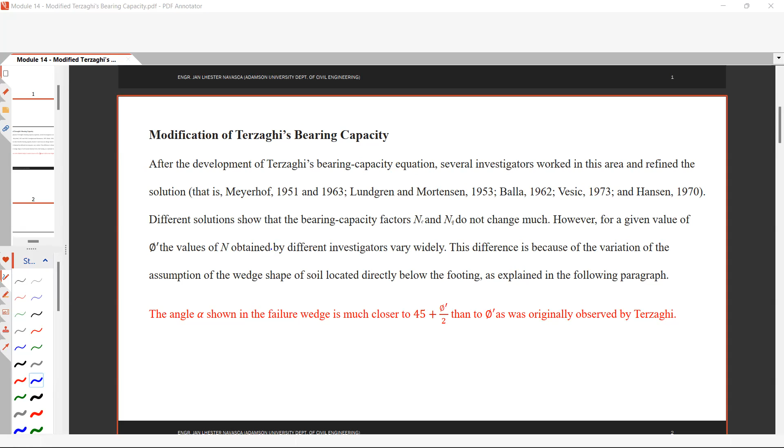It should be N gamma. So for a given value of phi prime, the values of N gamma obtained by different investigators vary widely.

In other words, the NC and NQ are not that far from the bearing factors provided by Terzaghi.

However, for N gamma factors, it shows different values, varying widely. This difference is because of the variation in the assumption of the wedge shape of soil located directly below the footing.

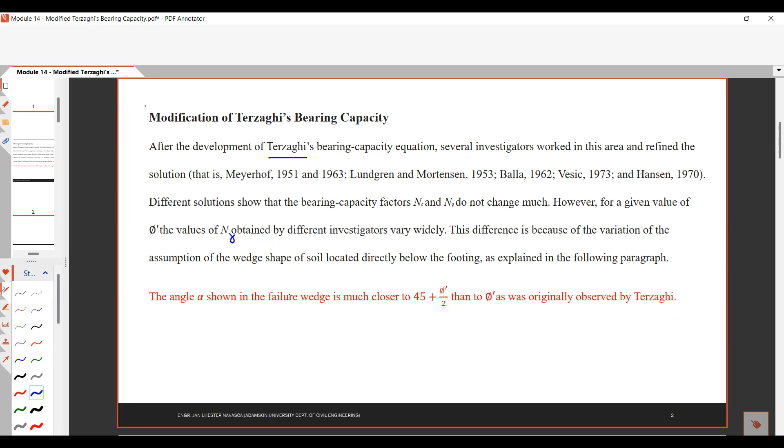As explained in the following graph, the angle alpha shown in the failure wedge is much closer to 45 plus phi prime over 2 than to phi prime, as was originally observed by Terzaghi.

Let's go back to the failure wedge. Let us open the failure wedge shown in Terzaghi's bearing capacity.

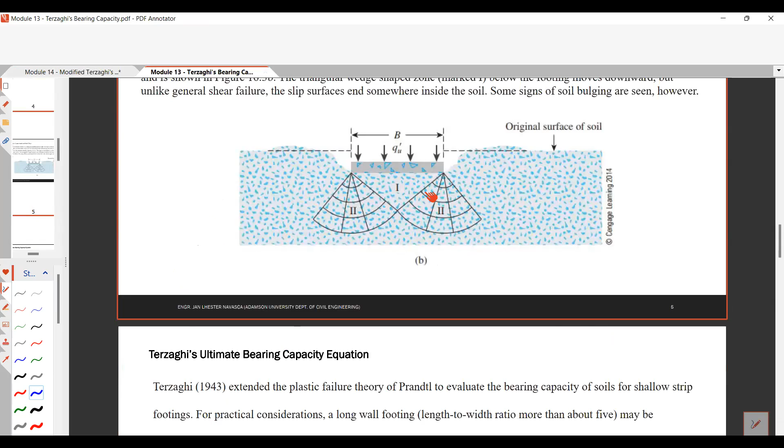Going back to this, the failure wedge they are referring to is this triangular wedge shape zone marked 1. According to them, the angle alpha at this failure wedge 1 is within this range, much closer to 45 plus phi over 2 than to phi prime, as was originally observed by Terzaghi.

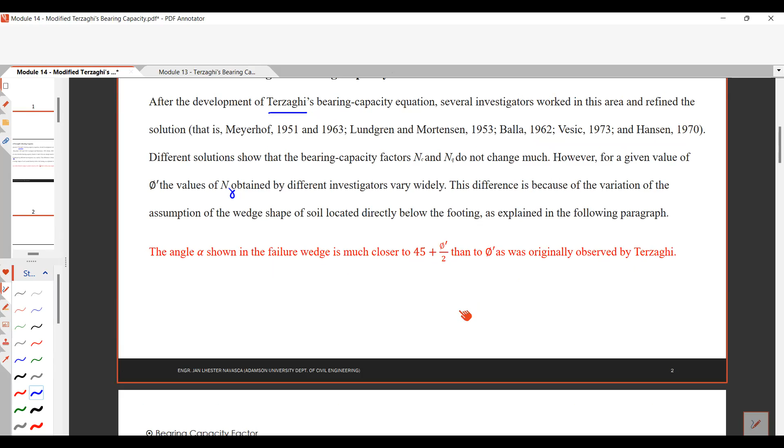Therefore, they provided new bearing capacity factors, based on Reissner in 1924, Prandtl in 1921, and Vesic in 1973. This was for NQ, NC, and N gamma.

For NQ, the bearing capacity factor is tangent squared of 45 plus phi over 2, e raised to pi tangent phi. For NC, based from Prandtl's equation in 1921, NC equals NQ solved from Reissner's equation minus 1, multiplied by cotangent phi. And from Vesic's equation, N gamma equals NQ minus 1 tangent of 1.4 times phi.

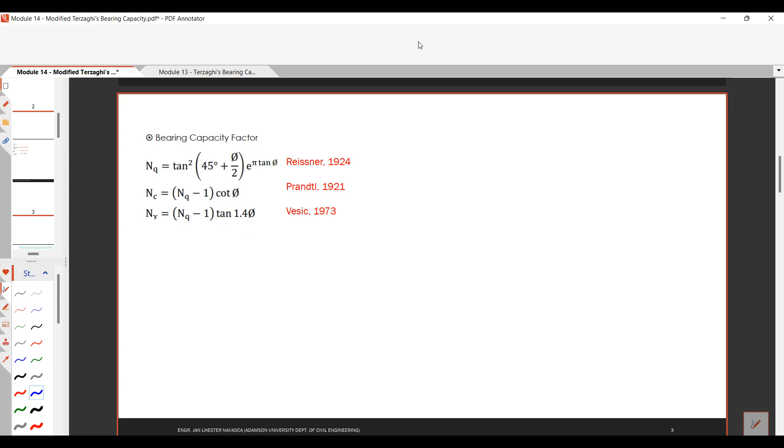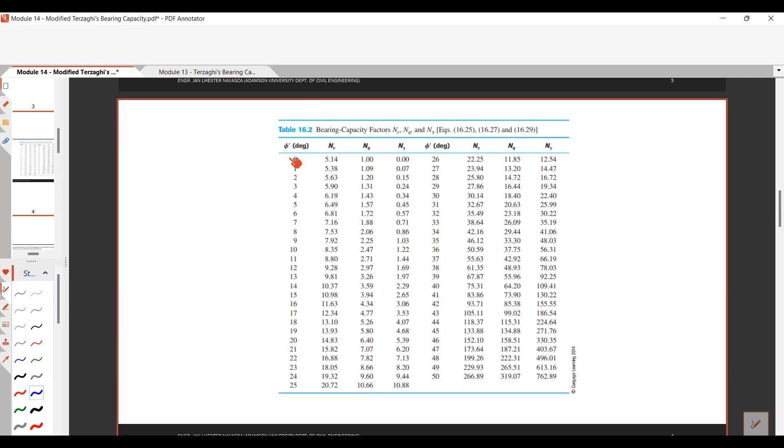So if you don't have a calculator that can solve for this, you also have new bearing capacity factors based on the equations by Reissner, Prandtl, and Vesic. 5.14 is for NC, that is for phi prime equals 0.

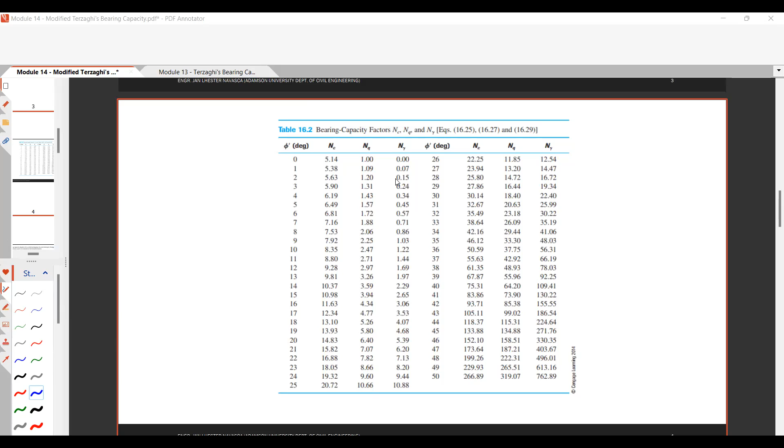Let us try to check this. Let's try checking 12 degrees. First, let's start with NQ.

So NQ is tangent of 45 plus, let me put x over 2, squared, multiplied by e raised to pi tangent x. Your calculator should be in degrees since the 45 is in degrees, 45 plus phi over 2, so your phi must be in degrees.

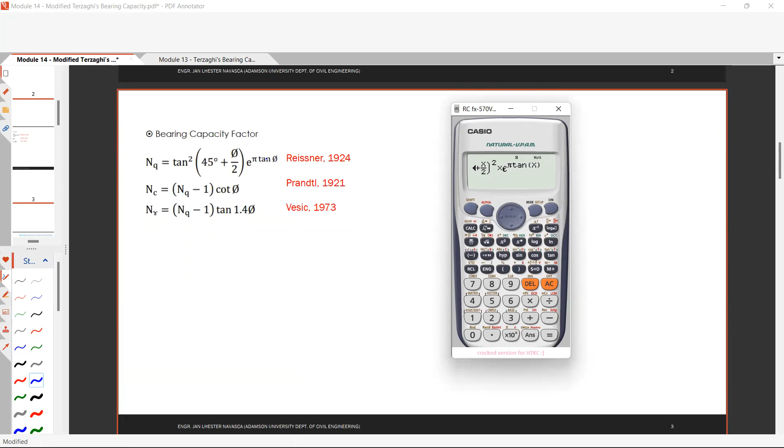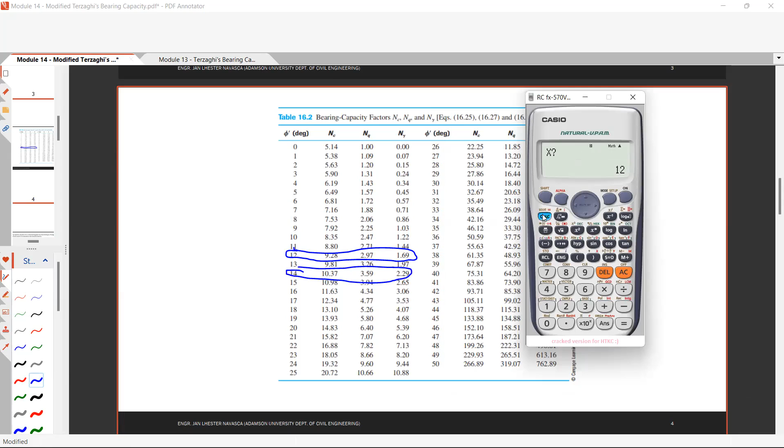Let's try 12 degrees. Solve for 12 degrees, that is equivalent to 2.97. Let's try 14 degrees. Calculate for 14 degrees, still get 3.59, which is also correct.

Let's try 50 degrees. Calculate for 50, that is equivalent to 319.057. Now let's solve NQ minus 1 cotangent phi.

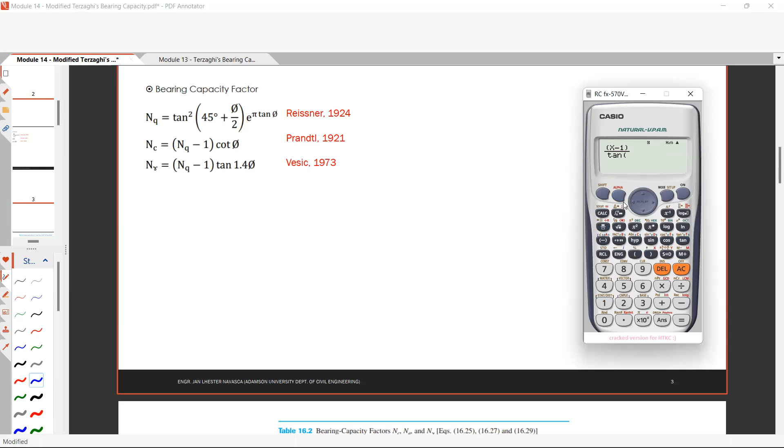So your NQ minus 1, cotangent is 1 over tangent, so divided by tangent, your degrees, let's put D.

Let's try for 12 degrees. Calculate... the alpha, sorry, should be shift. So calculate for 12 degrees, your NQ now is 2.97, then your D in degrees is 12, so you get 9.268 or 9.27.

It's probably 9.28 if we try to provide the exact value of NQ, but it still leads to the same answer. Calculate 3.59 for 14 degrees, then your angle is 14.

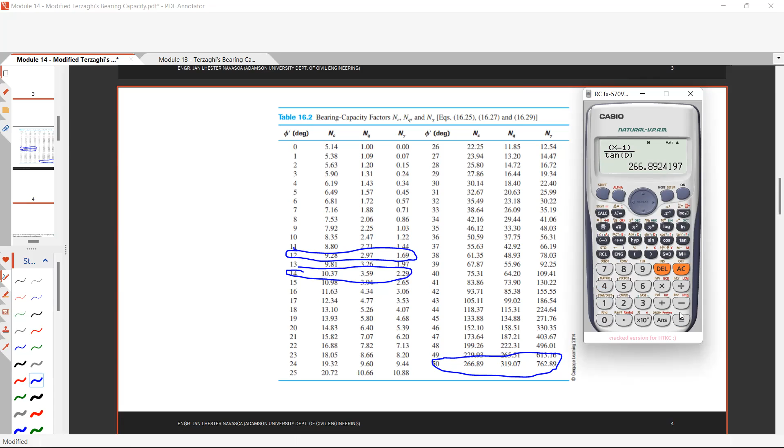So maybe that is 10.37 if we provide NQ, the exact value of your NQ. Then for 50 degrees, your NQ is 319.07 and your angle in degrees is 50. So that is 266.89. Okay, so they are the same.

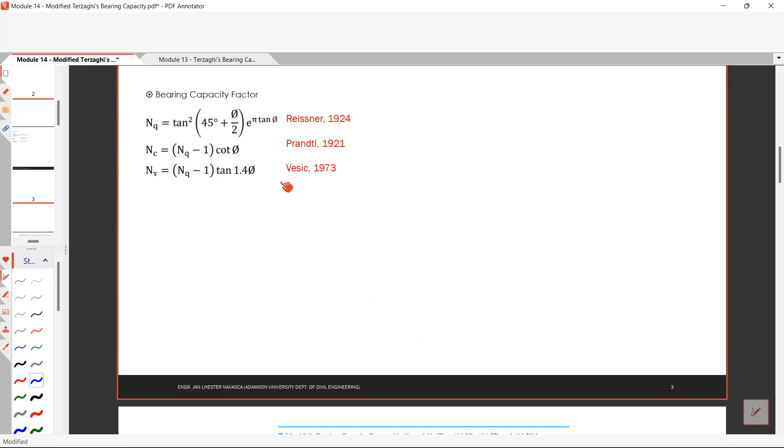So for N gamma, no need to check, but if you want, you can try these factors using this equation by Vesic.

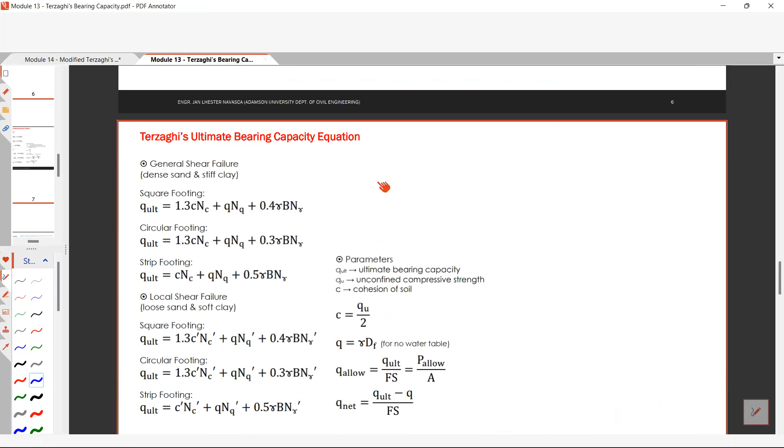Using these modified bearing factors, the soil bearing capacity equation for a strip footing given by Terzaghi can be modified for general use by incorporating the following factors. If you recall, the equation for strip footing provided by Terzaghi's equation is C NC plus Q NQ plus 0.5 gamma B N gamma, or 1/2 gamma B N gamma.

So according to the modified Terzaghi's bearing capacity, we can use the formula of the strip footing provided by Terzaghi for different bearing capacity of shallow foundation. We just incorporate additional factors: number 1 is the depth factor, number 2 is the shape factor, and number 3 is the inclination factor. We call this the general formula for the modified Terzaghi bearing capacity.

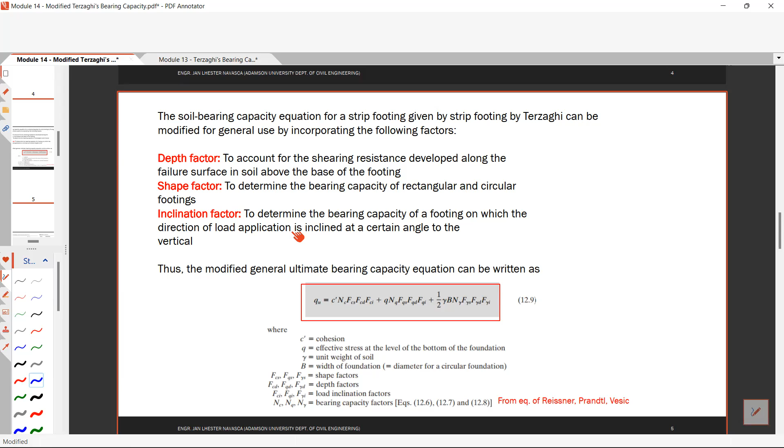For the depth factor, this is to account for the shearing resistance developed along the failure surface in soil above the base of the footing. The shape factor is to determine the bearing capacity of rectangular and circular footings, and the inclination factor is to determine the bearing capacity of a footing on which the direction of the load application is inclined at a certain angle to the vertical. So the modified general ultimate bearing capacity equation can be written as follows.

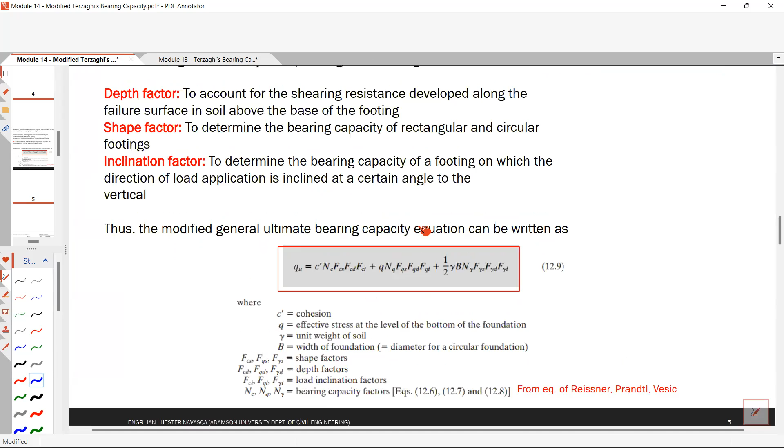You'll notice: C NC plus Q NQ plus 1/2 gamma B N gamma. This comes from the strip footing equation of Terzaghi. Then they provided additional factors: this one is FQS, the shape factor. This one is for shape factor, this one is for depth factor, and this one is for inclination factor.

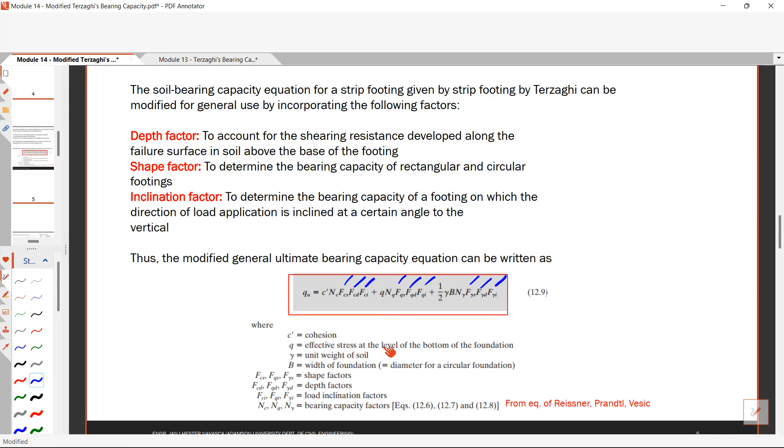Your C prime is cohesion. Your Q is the effective stress at the level of the bottom of the foundation, as I said before. Your gamma is the unit weight of the soil, and B is the width of the foundation or the diameter of a circular foundation.

We can also use gamma B. If you recall the steps I gave you to determine gamma B, this is the unit weight, that is the effective stress at the B distance level from the bottom of the footing, without including the effective stress at the top. You start at the effective stress at the bottom of your footing, so that is already your gamma B affected by the groundwater table.

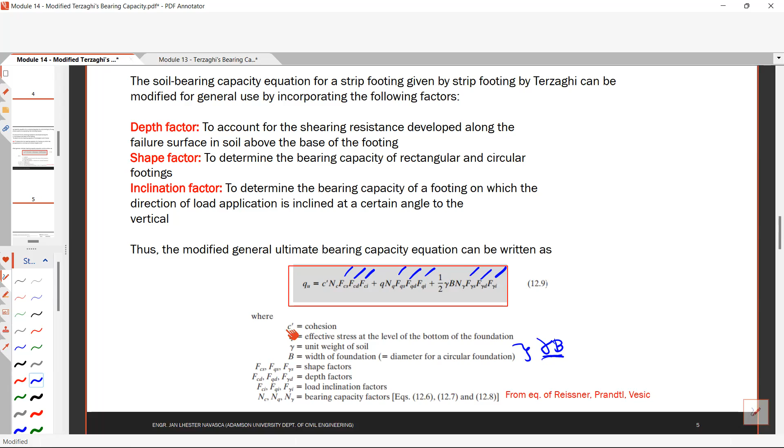Then your FCS, FQS, and F gamma S are the shape factors. FCD, FQD, and F gamma D are the depth factors. FCI, FQI, and F gamma I are the load inclination factors. NC, NQ, and N gamma are the bearing capacity factors from the equations of Reissner, Prandtl, and Vesic.

So that you won't get confused about the shape, depth, and load inclination factors, just check this: the subscript C stands for the cohesion equation. The subscript Q stands for the term with Q. And the subscript N gamma, F gamma is from the third term, which has the unit weight of the soil.

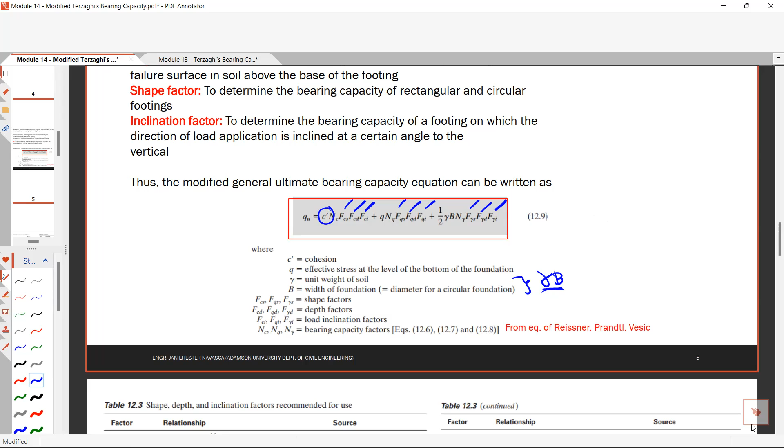Okay, so how to solve for the shape factors, the depth factors, and the load inclination factors. Let us consider now the shape factor.

According to De Beer in 1970, who was among those who tried to modify the Terzaghi equation, the shape factor is given by this equation. FCS is equal to 1 plus B over L times NQ over NC. Your FQS is equal to 1 plus B over L tangent phi prime. And your F gamma S is equal to 1 minus 0.4 B over L.

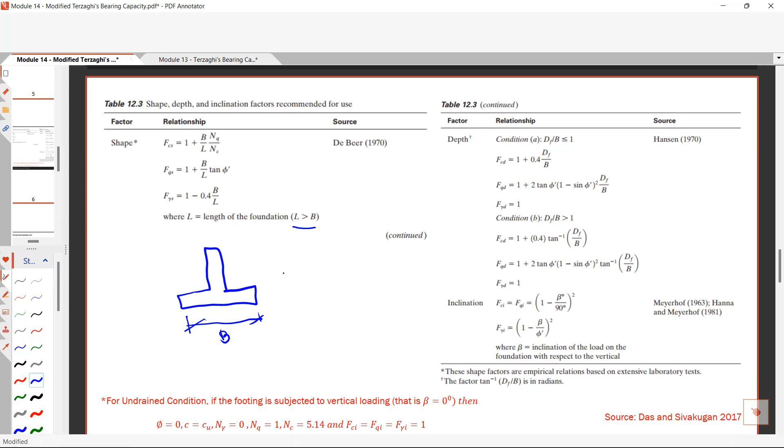Whereas your L is equal to the length of the foundation, and L is greater than B. So for example, the foundation you're designing is this one. So this is your B, and your B should be less than your L. The L is the larger one, away from your column. So this is the B, this is the L, and this is the column. Take note that your L should be greater than B.

Then for the depth factor, you have condition A and condition B. Condition A is when your df over B, or your depth of foundation divided by the width B, the ratio of your depth to width B, is less than or equal to 1.

So meaning your width B is larger compared to the depth of your foundation, your D sub F.

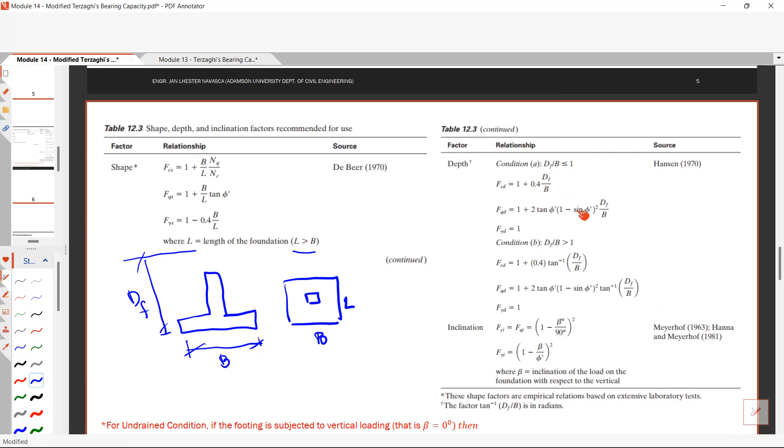Your FCD is equal to 1 plus 0.4 df over B, and your FQD is 1 plus 2 tangent phi prime multiplied by 1 minus sine phi prime squared multiplied by df over B, and your F gamma D is equal to 1. And condition B is when your df over B is greater than 1.

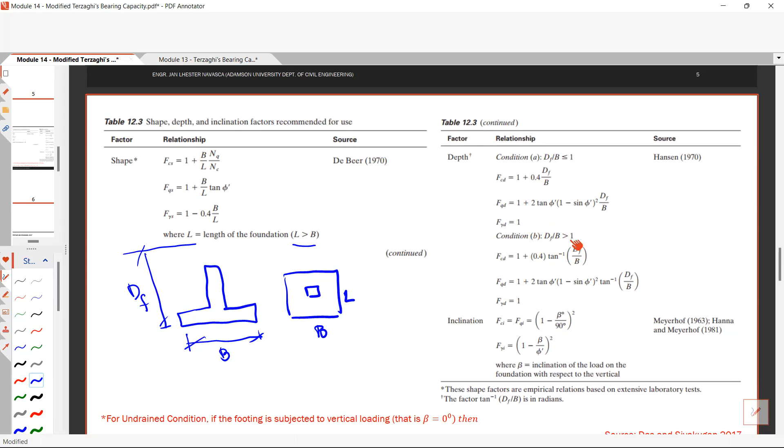So this time, the depth of the foundation is much greater than the width of your foundation.

Your FCD is equal to 1 plus 0.4 tangent inverse of your df over B. Take note that your tangent inverse of df over B should be in radians, since your df and B have units, and this is basically a ratio of distances, df over B.

Therefore, it should be in radians. Your FQD is equal to 1 plus 2 tangent phi prime times 1 minus sine squared, times tangent inverse of df over B. And your F gamma D is equal to 1. So for inclination factors, this comes from Meyerhof 1963 and Hanna and Meyerhof in 1981.

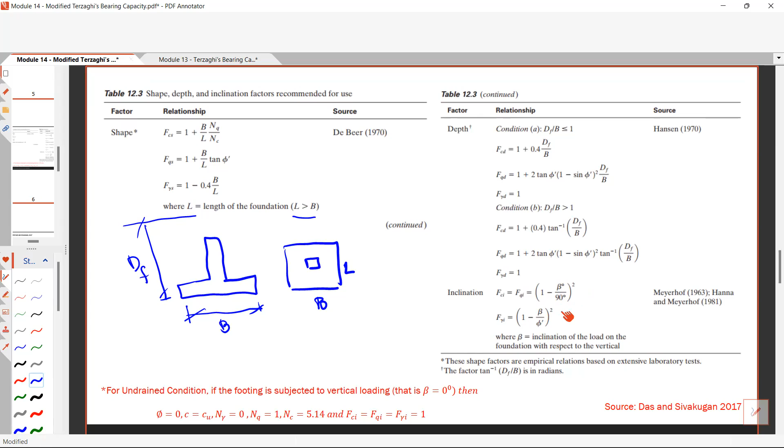Your FCI is equal to your FQI, that is equal to 1 minus beta over 90 squared, beta in degrees divided by 90 degrees squared. Your F gamma I is equal to 1 minus beta over phi prime squared. Your beta is the angle of inclination of the load on the foundation with respect to the vertical.

So for example, I have a load like this. I have an axial load P. So when you have an axial load P, or basically a straight axial compression P, the angle from vertical, your beta, is equal to 0.

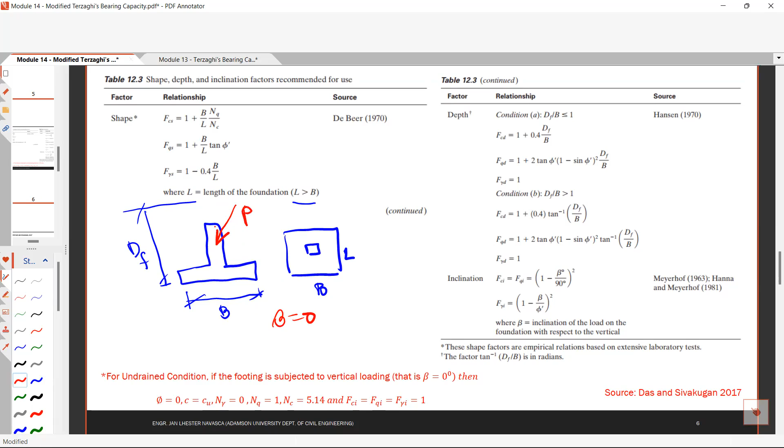However, if you have an inclination, so what if your load has an inclination? Let's say this one, this is your P, and this will be your angle beta.

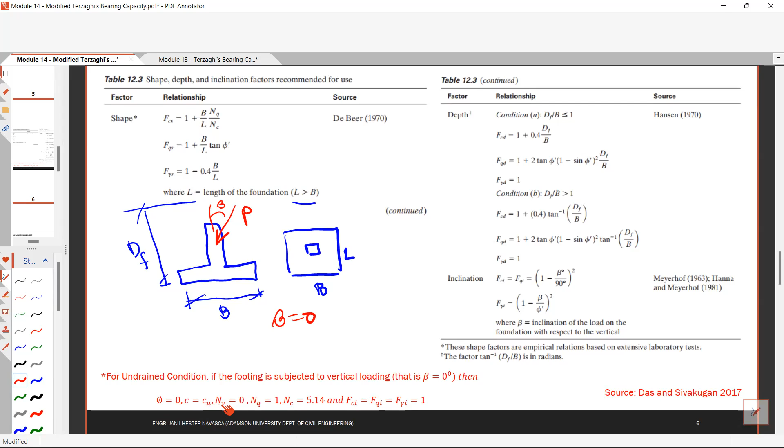So for undrained condition, if your footing is subjected to vertical loading, that is when your beta is equal to 0, then for undrained condition, meaning your phi is equal to 0. Your cohesion is equal to C sub U, and your N gamma is equal to 0 if you check the equation for N gamma. Your NQ will come up to 1, and your NC will come up to 5.14.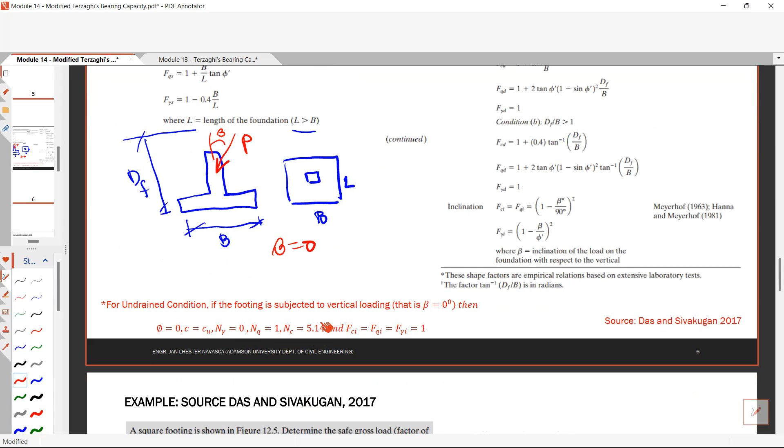So you can already check this for phi equal to 0. So there, if you check the inclination factor using this condition, your FCI, your FQI, and F gamma will be equal to 1, when your vertical loading beta is equal to 0.

When your vertical loading beta is equal to 0, this will cancel out, and this will also cancel out, so your inclination factors will all be equal to 1.

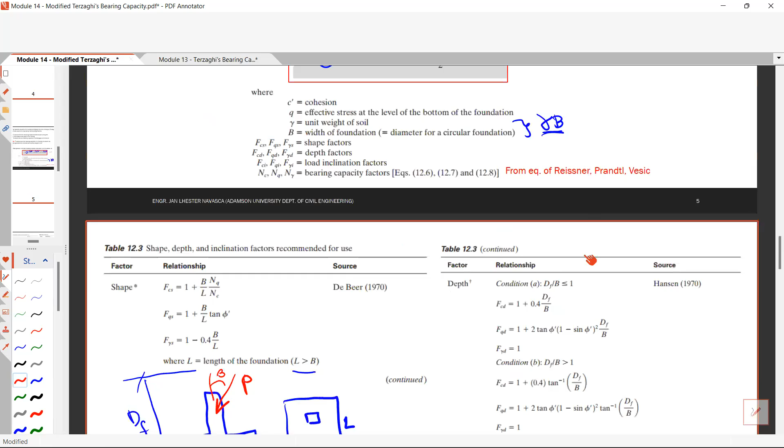So take note again that your tangent inverse df over B should be in radians, and these shape factors are empirical relationships based on extensive laboratory tests by these different sources.

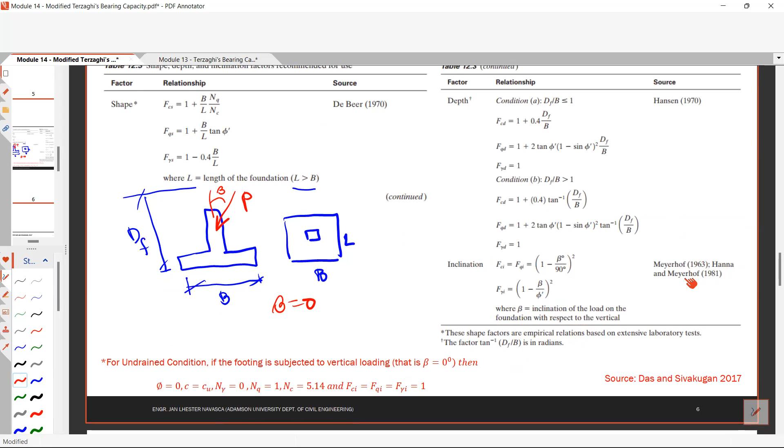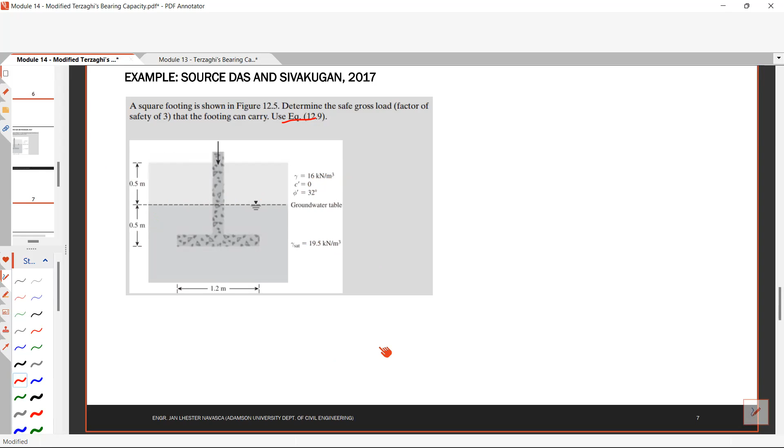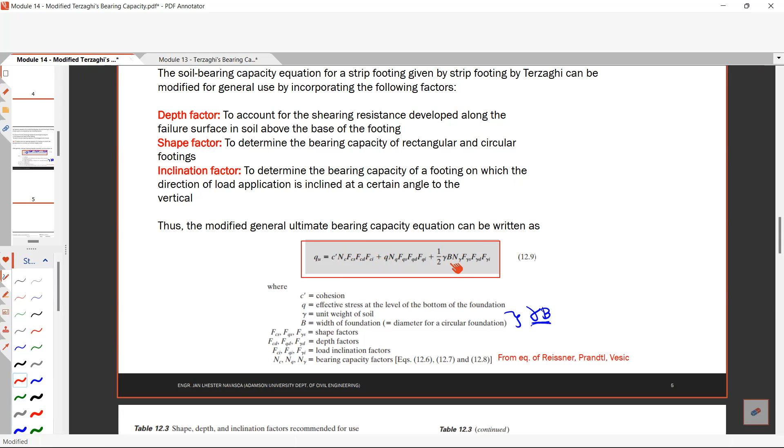Let us try to solve this problem using the equation of modified Terzaghi, equation 12.9. According to this equation, we need to find C, FCS the shape factor, the depth factor, and the inclination factor, your Q, your NQ, your gamma B, and your N gamma. Let us try this equation.

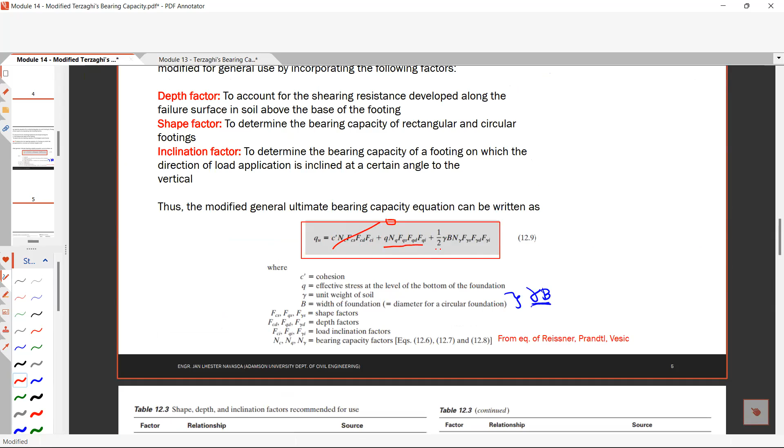According to the problem, your cohesion is equal to 0, therefore this first term will cancel out. When C prime is equal to 0, your only equations are the second and third term. So we have this equation: Q NQ FQS FQD, plus 1/2 gamma B N gamma F gamma S and F gamma D.

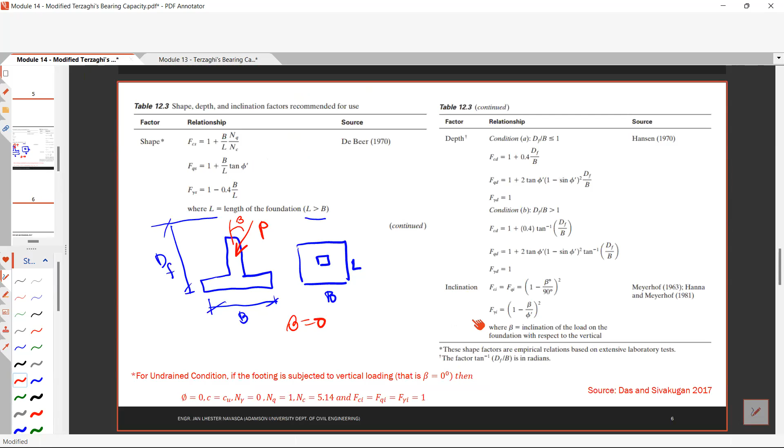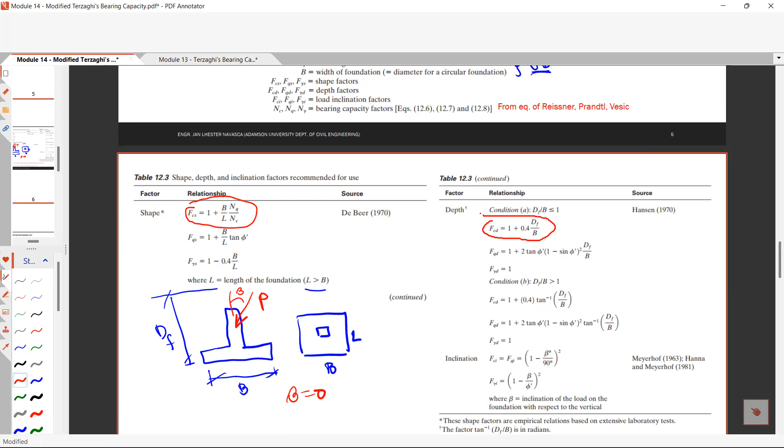So all the terms with cohesion are gone, all the F cohesion shape factors are gone. This one with the cohesion factor is gone, and also this one, and this one, and this one. All the terms with cohesion are gone.

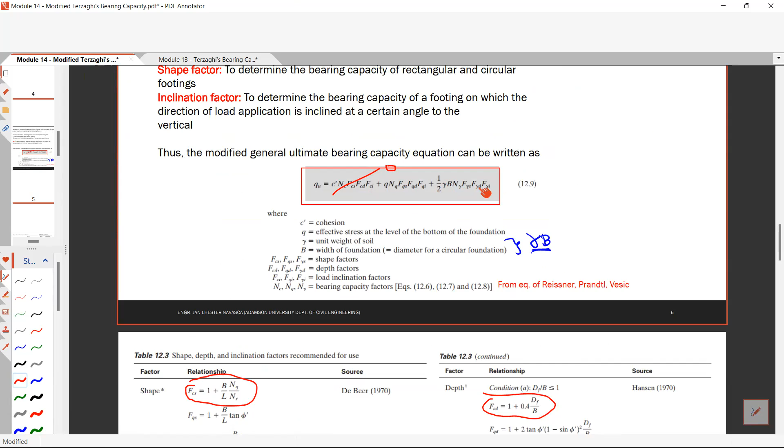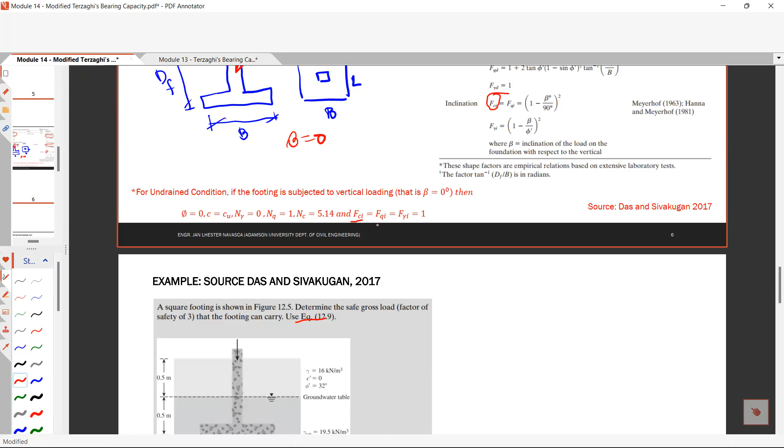So what we have left is the factor N, FQS, FQD, FQI, F gamma S, F gamma D, and F gamma I. Also take note that we have a vertical loading. If you have a vertical loading, your beta is equal to 0, therefore your FCI, your FQI, and your F gamma I are equal to 1. What you have left is this equation only.

So the factor of 1 is gone here, there's still a 1 there, then here another 1, so those are gone since they're just 1. I remember during my college days, we needed to memorize all these factors of the modified Terzaghi's bearing capacity. So we need to memorize that.

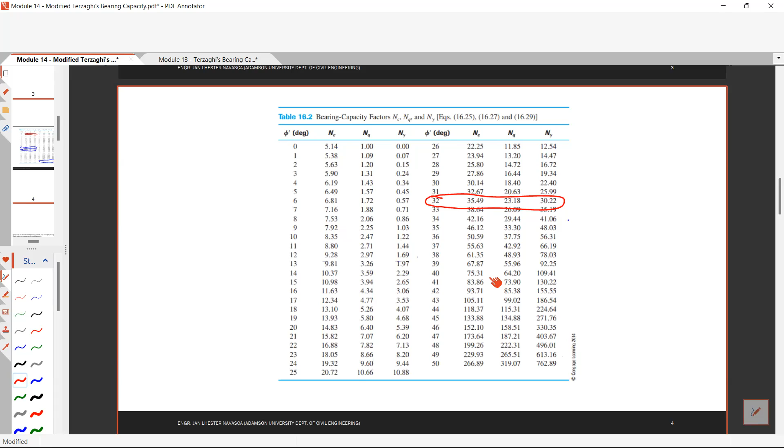Checking the bearing factors NQ and N gamma using a phi that is 32 degrees. Let us check, we have a phi that is 32 degrees. So therefore we have 35.49 NC, 23.18 NQ, 30.22 N gamma. NQ and N gamma are what we need, so 23.18 and 30.22.

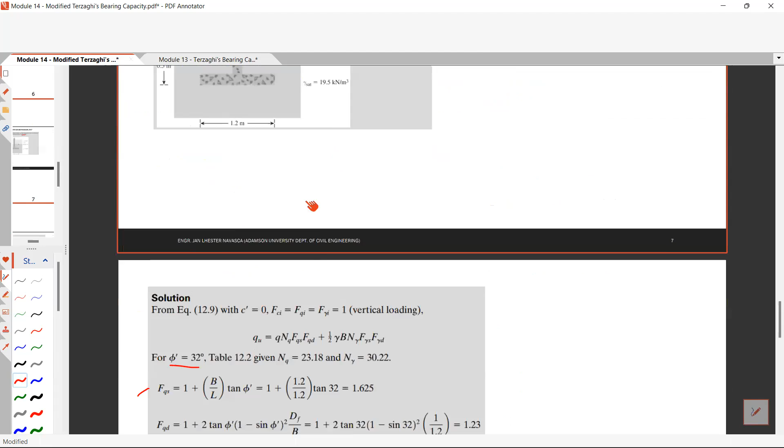Let us solve the shape factor, let's do this one and this one first. The shape factor FQS, according to the table, is equal to 1 plus B over L tangent phi prime, and your F gamma S is 1 minus 0.4 B over L. Since our footing has a 1.2 by 1.2 meter width, your FQS is 1 plus B over L tangent phi, that is 1 plus 1.2 over 1.2 tangent 32, which is 1.625. And your F gamma S is 1 minus 0.4 times B over L, that is 1 minus 0.4 times 1.2 over 1.2, you have 0.6.

Then we need to find the depth factors, this one and this one. Let's check the depth factors. So what do you think is our condition?

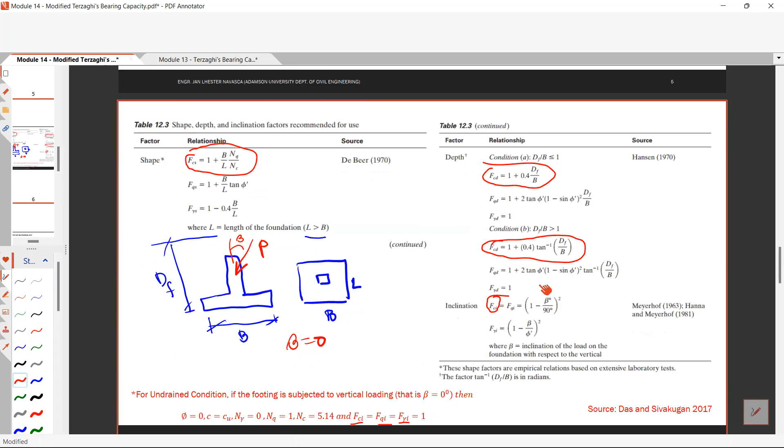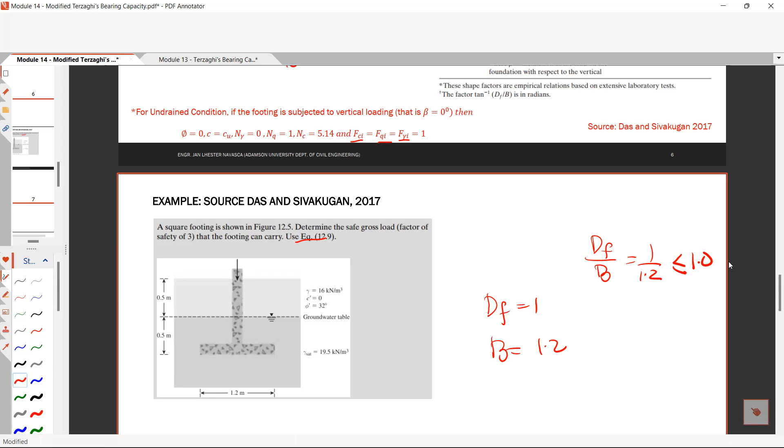Okay, your DF is equal to 1 meter and your B is equal to 1.2 meters. So your DF over B is equal to 1 over 1.2, which is obviously less than 1.0. Therefore, this is case A.

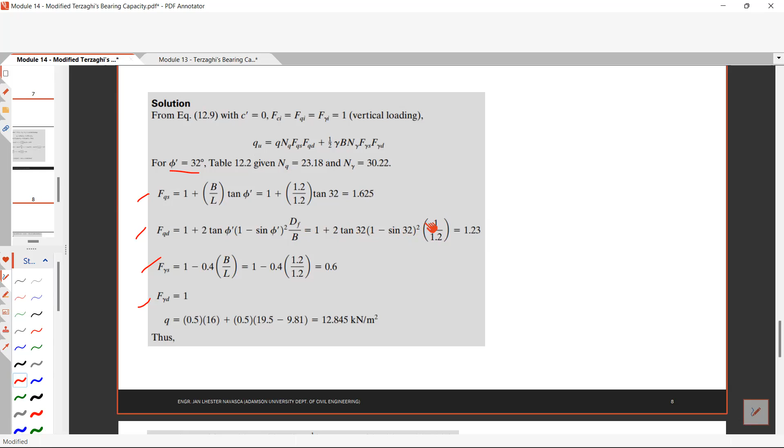And under case A, your depth factor FQD is equal to this equation, and your F gamma D is equal to 1. So that is why your FQD is equal to 1 plus 2 tangent 32, 1 minus sine 32 squared, multiplied by DF over B, you have 1.23. And your F gamma D is equal to 1.

Okay, then we need to find your Q. So let's solve that too. Let us solve this. So our Q is basically the effective stress at this point, this level.

Your Q is equal to, okay, 16 times 0.5, is that right? Multiply by, plus the saturated unit weight minus the unit weight of water, multiplied by 0.5 meters. Therefore your Q is equal to,

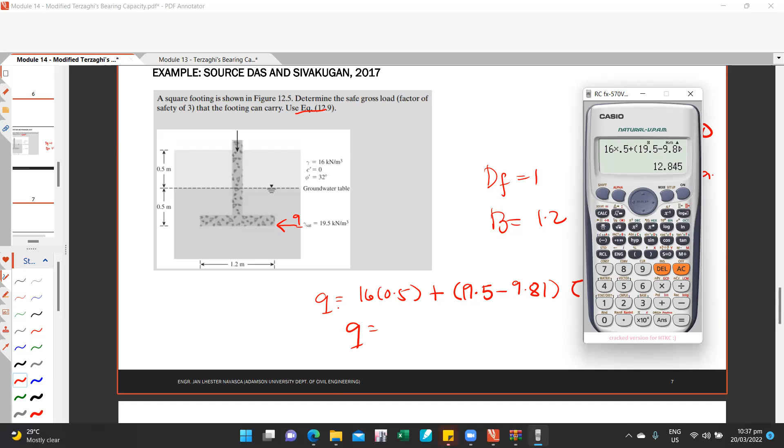okay, your Q is equal to, so 16 times 0.5 plus 19.5 minus 9.81 times 0.5. That is equal to 12.845. So if you go back, that is equivalent to 12.845 kilonewton per square meter.

Okay, then we need to find this gamma B. Let's find this gamma B. So according to what I told you for gamma B, let us find this B distance. Our B distance is equivalent to 1.2. So we need to find the effective stress at this point, and this will be our gamma B.

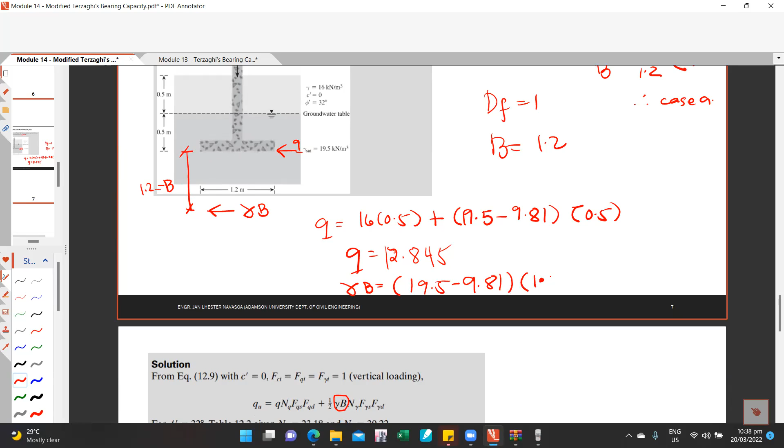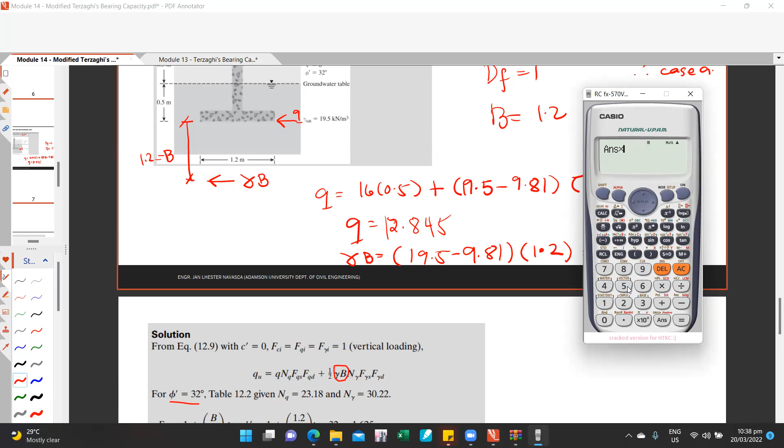Therefore, your gamma B is equal to, what is this effective stress at this point? That is equivalent to gamma sat, which is 19.5, minus the unit weight of water multiplied by the distance B, which is 1.2. That is equivalent to 19.5 minus 9.81, multiplied by 1.2, which equals 11.628.

Okay, so let us check if we have all the parameters or all the data. We have your Q, we have your NQ, the shape factor FQS, and the depth factor FQD. Your gamma B is okay, your N gamma is okay, the shape factor F gamma S, and the depth factor F gamma is also okay.

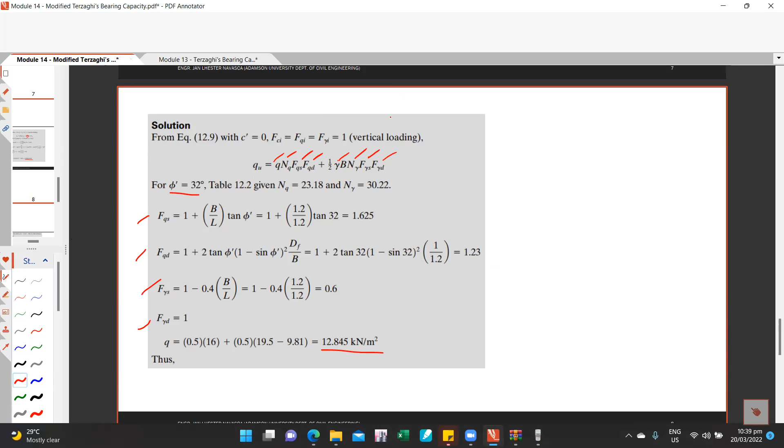Okay, so therefore, we can now solve for ultimate bearing capacity Q sub U. So 12.845, 23.18, 1.625 times 1.23 plus one half. Again, this is your gamma, this is your gamma B, the same, this is your gamma B. That is 30.22, that multiplied by 0.6 times 1. You have 700.54 kilonewton per square meter.

Okay, so according to the problem, the problem is asking what is the safe gross load using a factor of safety of 3. So your Q allowable is equal to your QU divided by Fs. So meaning your bearing capacity divided by the factor of safety, that is your allowable.

So therefore, 700.54 divided by 3, that is equal to 233.51. You have 3 times the factor of safety. So you will only allow this much stress in your soil. Okay, so you have room for error, so to speak.

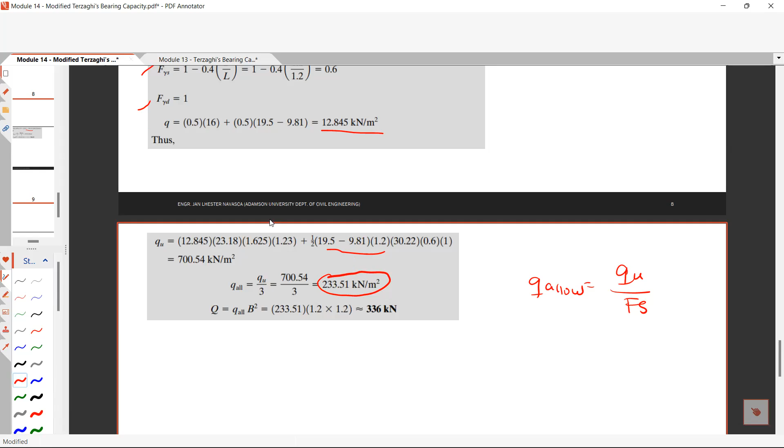Okay, so to determine the load, basically, your stress is equal to force times area, right? Your stress is equal to force over area. So to determine the force, that is equal to the stress times area. So therefore, your stress, let's say, denoted as Q, and your point load or your actual load is equal to denoted as large Q, and your stress is equal to the Q allowable, what you allow for your design, which is your QU over Fs, multiplied by the area of your foundation. The area of your foundation is B squared.

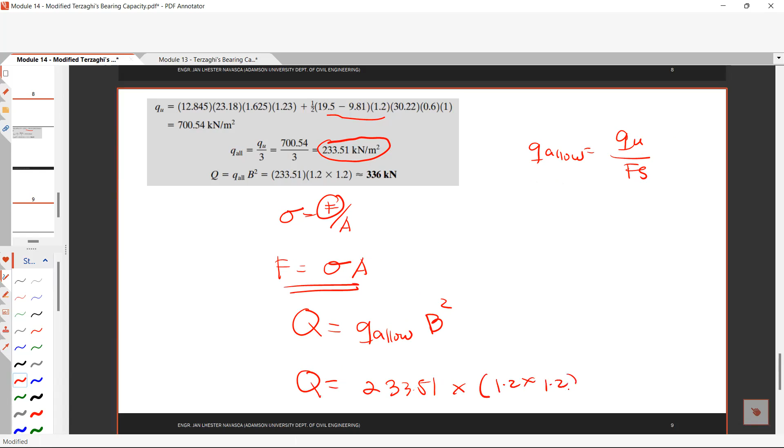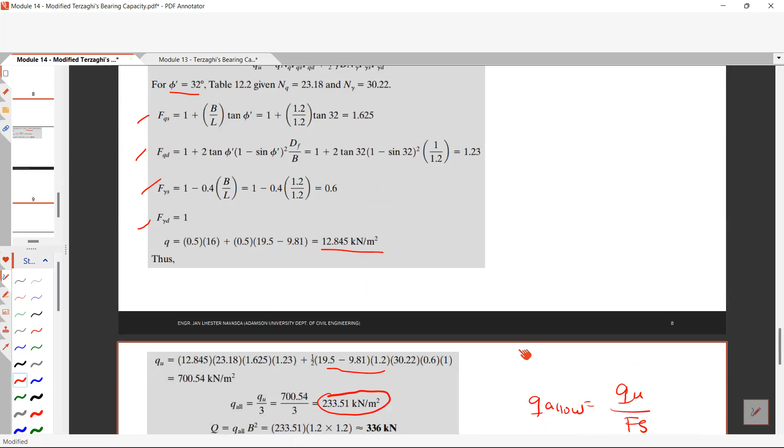So therefore, that is equivalent to 233.51 multiplied by 1.2 by 1.2, you will come up to approximately 336 kilonewton. Okay, so this will be your allowable or the safe gross load with a factor of safety of 3.